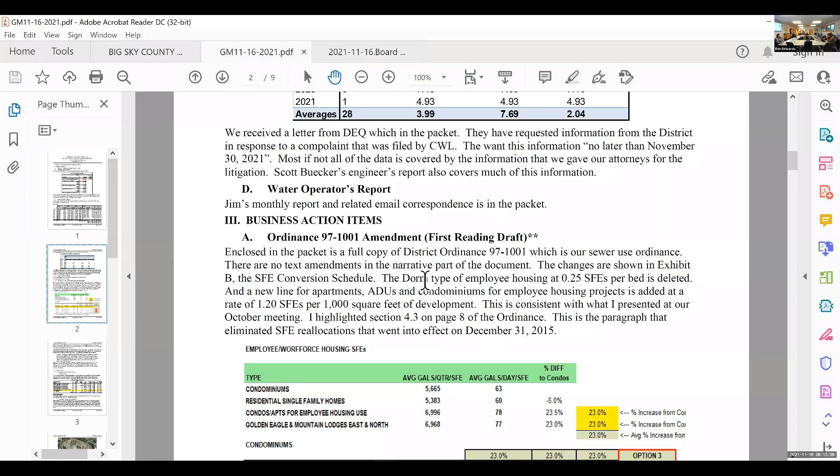All right, so I wrote a little narrative on this. This is a follow-up to our meeting in October. The table in my report is what I had presented at that meeting, and it was the consensus of the board to put this forward into effect.

The recommendation was to go with 1.20 SFEs per 1,000 square feet for ADUs, apartments, condominiums that would be used for employee housing. As they started looking at this, originally I thought we would just make an amendment to our rate resolution, which is a one-time approval. But the table, Exhibit B, resides in Ordinance 97-1001, which is our big sewer use ordinance.

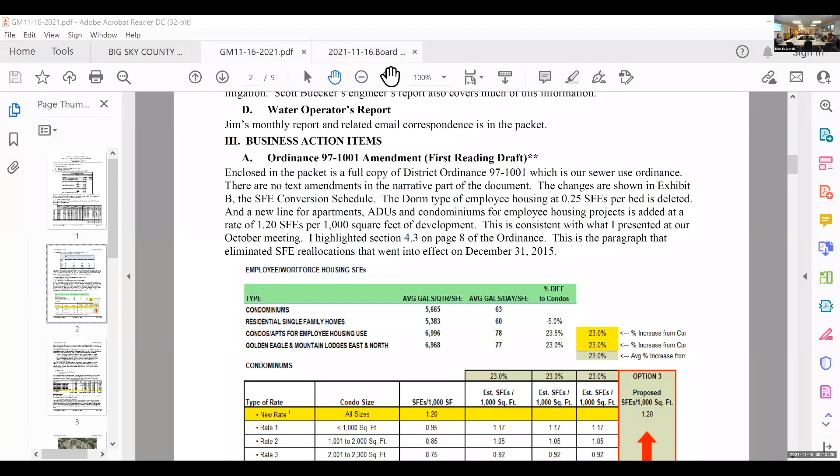And I put a copy of the entire document in the board packet for reference, but the only amendment is actually to the exhibit. And in my report, I commented that I'm going to talk to Susan about pulling that out of Ordinance 97-1001 and putting that as part of our rate resolution material, which makes these amendments much simpler, because now we're into a first reading, second reading, and it takes 3 months, 3 board meetings to accomplish these kinds of changes, which is not the best setup.

So on Exhibit B, we're going to delete dorm style housing as a category, and that was a per-bed 0.25 SFEs. We're going to add in apartments, accessory dwelling units, and condominiums per 1,000 square feet at the rate of 1.20. That's the only amendment that is presented here.

The base rate stuff will go in our rate resolution, which we can't really do until this is approved, and this is going to take 2 or 3 readings. If we make no changes to this document, it can be approved after the second reading. If it changes between now and second reading, then we're going to a third reading. And I do think that this should come out and be part of our other rate resolution document.

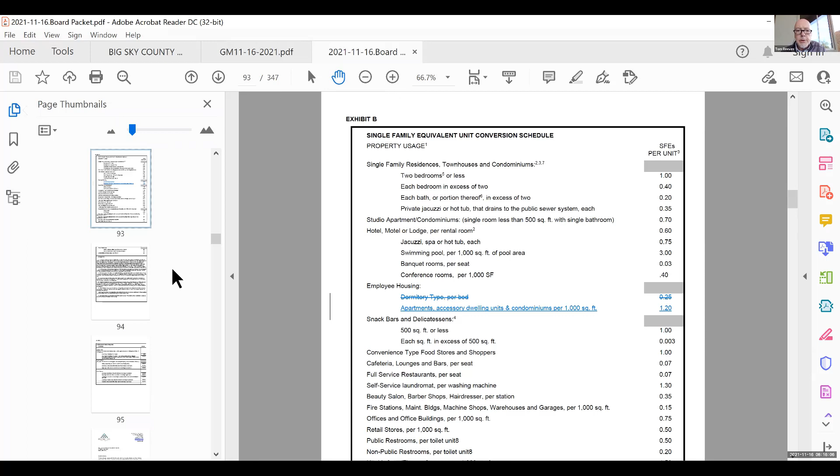I heard that you said that Danny Bierschwale was in the audience. Could you comment on what your expectation is of the impact to our commitment for 500 SFEs for affordable housing?

Yeah, Tom, thanks, appreciate that. Danny, come up to the microphone here. So in the board packet, Danny sent me a letter.

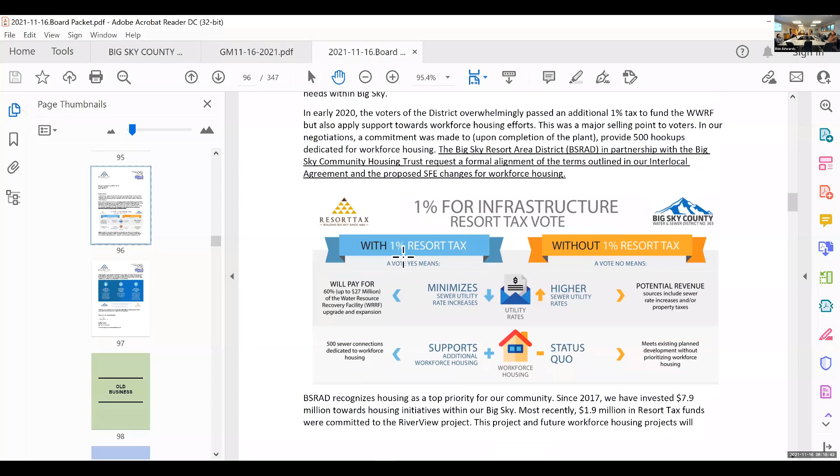It's the last 2 pages of the business action section. He's citing material that was circulated prior to the election, and it does use the term hookups. Hookups are all over the place for us, so we measure things in terms of SFEs.

Our interlocal agreement clearly calls out 500 SFEs, and I'll let Danny comment past that.

Yeah, just wanted to certainly appreciate the fact that you all are going through and trying to create equity around your rates and making sure that you're being fair across the board.

In our initial discussions related to the commitment of the 1% for infrastructure as it relates to WWRF, we had initially discussed 500 units. We had been working towards hookups. Maybe it's semantics, but our expectation at that point was targeting this concept of 1,400 units that we were trying to achieve for workforce housing, which is a target that the community had identified in planning for community housing initiative here within Big Sky.

At the date that we had signed the interlocal agreement, an SFE was an SFE for a workforce housing unit. So it never really came up in discussion. And as you all are going through this ordinance revision, I just want to make sure that we're honoring what we had told the voters and what the spirit was of our initial discussions as it relates to workforce housing.

I'd use the specific example of this Riverview project: they're seeking 100 SFEs, and under the new equation, if I did the math right, it's somewhere between 130 to 150 SFEs that would wind up getting utilized. So essentially, what would have been 100 going away and depleting from that 500, bringing our balance down to 400, but now all of a sudden have a different equation that we're operating within.

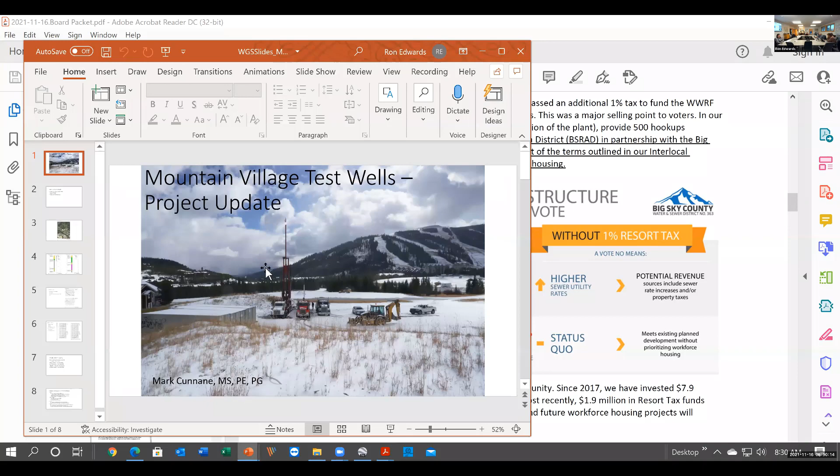Mark, can you hear us all right? I can, can you hear me? Yeah, we got you. Okay, so you'll be operating the slides, Ron?

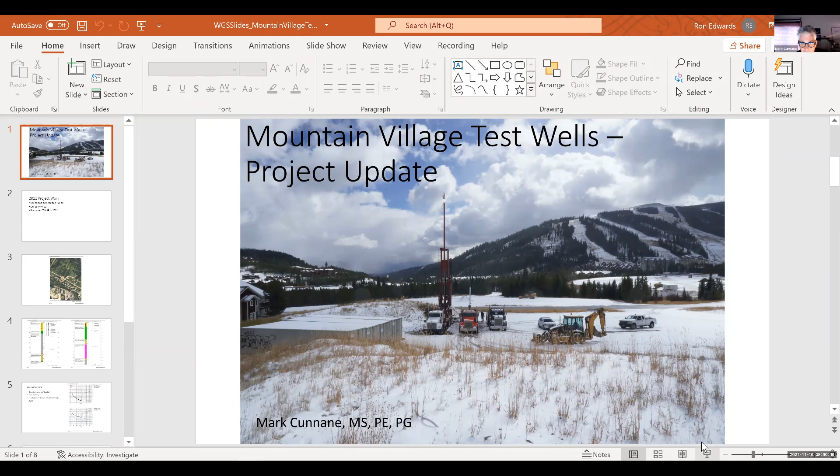I will. Okay, well, this is just the test well 7 site. Just kind of a background photo, so we can go ahead and move on. Next slide.

Okay, so this past season we drilled and tested test well 8. I'll show those locations on a map on the next slide. Then we drilled test well 10. Those are both right in Mountain Village. We didn't drill test well 9. There were a few site issues with it, but also it was targeting some of the intrusive igneous rock, and we just have not found that to be water bearing. So I've got a suggestion for a relocation of that well that we'll go over in the presentation.

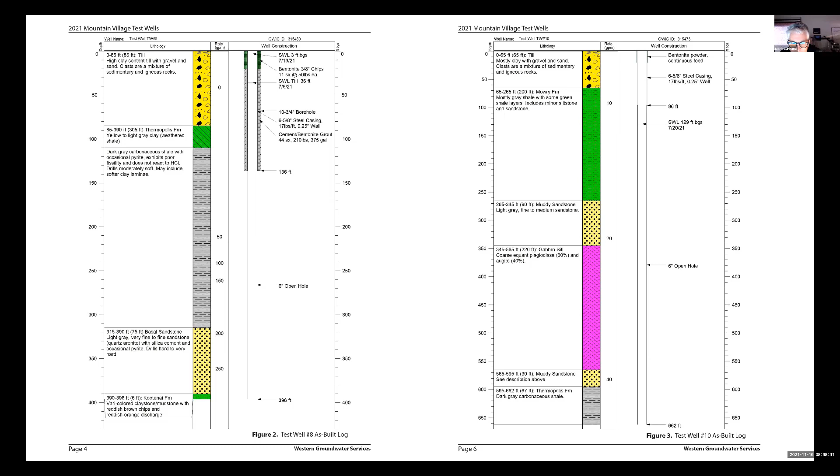Okay Ron, we can move to the next one, please.

So we did a step rate test in well 8. The driller provided the temporary pumping system and installed all that equipment. We did a step rate test, then came back and did a constant rate test. The step rate test data is in my memo—I won't go over it today, but it indicated we could run our constant rate test at about 200 to 225 gallons a minute. We ended up running it at 220 with some minor fluctuation around that rate.

So what we saw is that in test well 8, the drawdown continued through the duration of testing, and the recovery was not what you'd hope for. We're seeing the effects of boundaries on the aquifer again, which we've seen in test well 2 and test well 7, so we've pretty much nailed down that condition. We also saw it in Mountain 5 and Mountain 6.

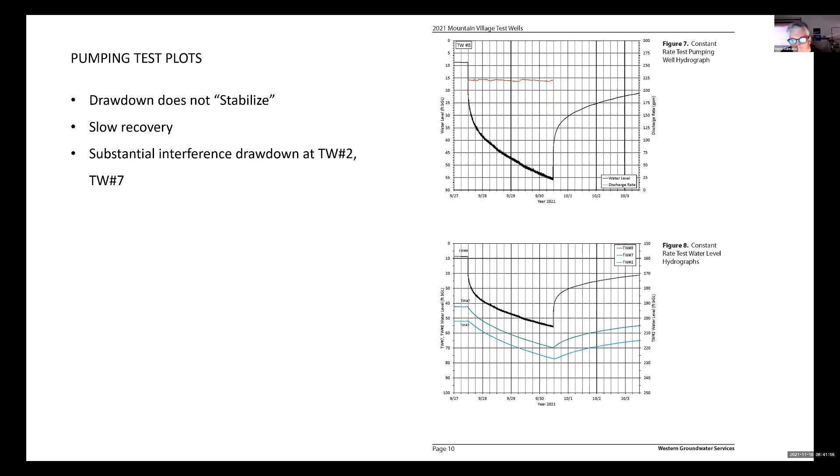So here's the hydraulic analysis that I do to estimate what our well capacity can be. And I've discussed this with you prior in relation to the other wells where we've seen the bounded response, which is well 2 and well 7. Those are the only other two we tested.

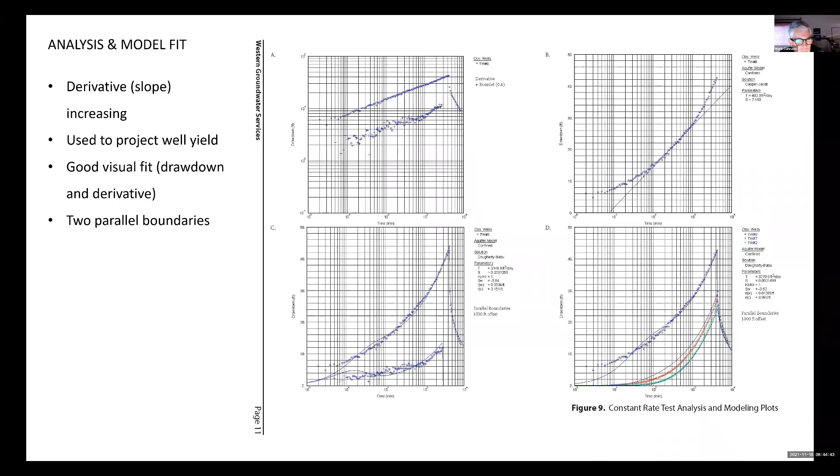So, okay, water quality - I've got the yield, and I ended up estimating that well for 110 gallons a minute, 56 acre-feet a year. That's on the following slide. But anyway, the water quality was good.

I was surprised you didn't have sulfides given you're producing mainly out of the shale units. Yeah, there wasn't a whiff of them - we measured sulfide as non-detectable, but I also, in the field, collect it in a bottle, shake it up, and uncap it. That's one way you can kind of get an idea if you've got sulfide, and yeah, there was no odor with it. It did have a lot of carbon dioxide in it, which is not uncommon, especially in these aged formations. But it degasses - that's the case where you fill up a bottle and it's cloudy, and you let it sit for 30 seconds and it's crystal clear. That's kind of how this water is coming out of the ground.

But the iron and manganese was non-detect. The sulfide, arsenic was non-detect. The radionuclides, you see very low level detections, other inorganics too. It did not measure the organics - we typically don't worry about those in wells like these, because they've got to be related to some sort of anthropogenic input, and we just don't have that source to get to these depths in a well sealed like this. But the dissolved oxygen is non-detectable.

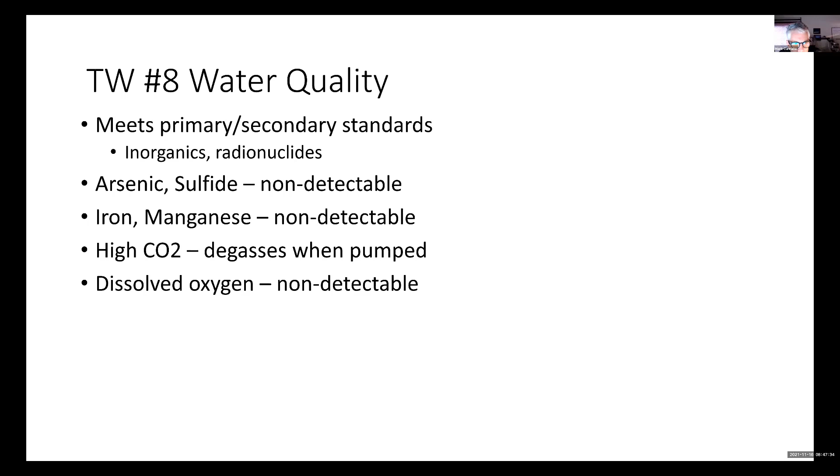Not surprising there. The one thing about this is like well 7 had arsenic, it had iron and manganese, it didn't have sulfide. But you think when you pump a well like this with that kind of hydraulic connection, there's certainly a chance the water quality could change to some degree over time. Particularly when you produce a well for longer duration, you'll start to produce from zones that may not have been contributing much during this short-term test, but could contribute a greater proportion of the flow over a longer pumping period. So you might see that water quality change, but at least from what we have, that's a good result. So you can go ahead, Ron, to the next one.

So the one thing about that design rate and volume, I've listed it here, and this is in the report also: the 110 gallon a minute, 56 acre feet. The 110 gallon a minute is the modeled pumping rate for 180 days continuous pumping to use up the available drawdown in that well. The 56 acre feet is 5 years. So we're getting out there quite a ways, right? But as compared to the time period we tested, which was 3 days.

But what I can't do with the model is know whether that capacity is going to stabilize, and whether you're going to go on with this use indefinitely, or whether you're going to start to see that curtail with time. I don't know that, so that's why I've got that caveat: production capacity could diminish with use. Maybe it'll be better than I modeled. Typically with that kind of trend, the way that data continued, I wouldn't really expect that, but there's always surprises.

Completion phase: I didn't do a cost estimate, but the way pricing is now, I would expect something on the order of $500K to get this well connected to the system. Of course, that work can be done in the planning phase, but from the discussions we've had with Jim and Ron, this would connect into the upper system. So it would connect into a pipe very nearby that would go to the Cascade booster. And I understand there's treatment considerations for 5 and 6, and that kind of all happens in the same place. So this would be a fit.

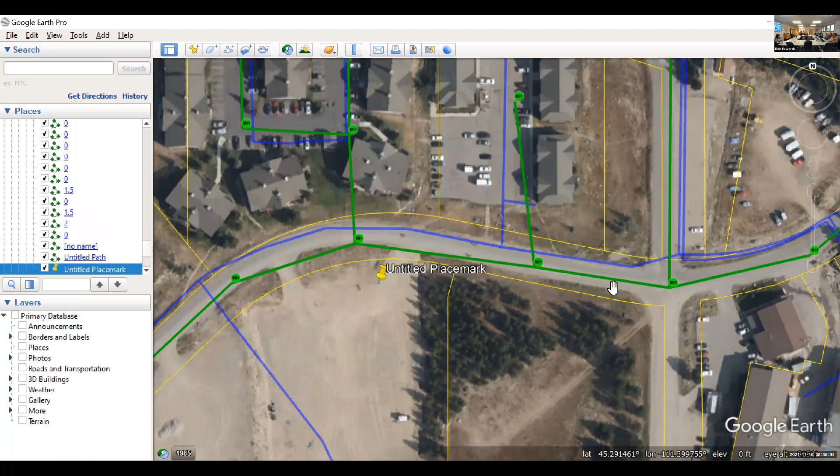So, Jim, you want to comment on the hydraulics of this? Let me back out. So we've got this dedicated line that runs up to the Cascade booster station. Isn't it a little bit... where the well is? One of the benefits of this location, we're too far, the test well's right here. Well, you need to, Jim, come back and talk to the mic. Oh, okay, just use the mouse to point stuff out.

Well, the goal is to get water to the Cascade, make Cascade be independent of the Meadow system like it was originally. This well is in a good location to contribute to the Cascade side, because here is the location of the test well. Got the issue with the sewer, but as Mark said, we've got a lot of things going in our favor to not make that a big deal. But this pipeline where you see here, there's 2 of them.

One of those is a force main where we are right now bringing the hill water up to Cascade. So this is a force main going directly to the Cascade booster. The distance to tie this into Cascade is literally from here to here. It's a very good location for that.

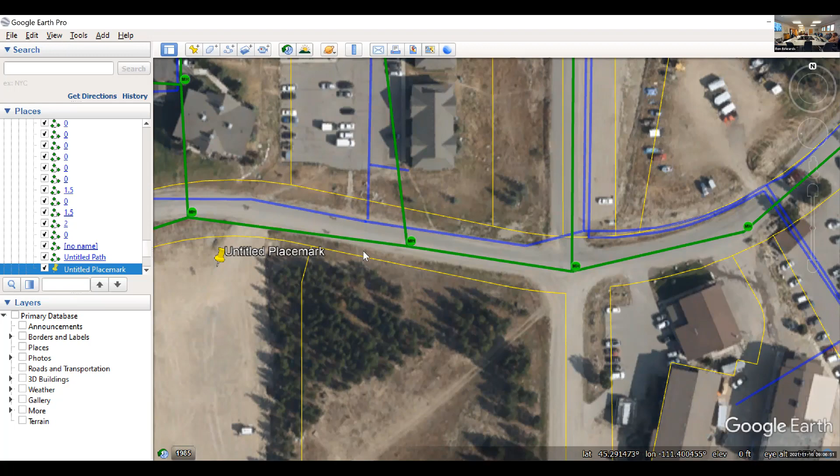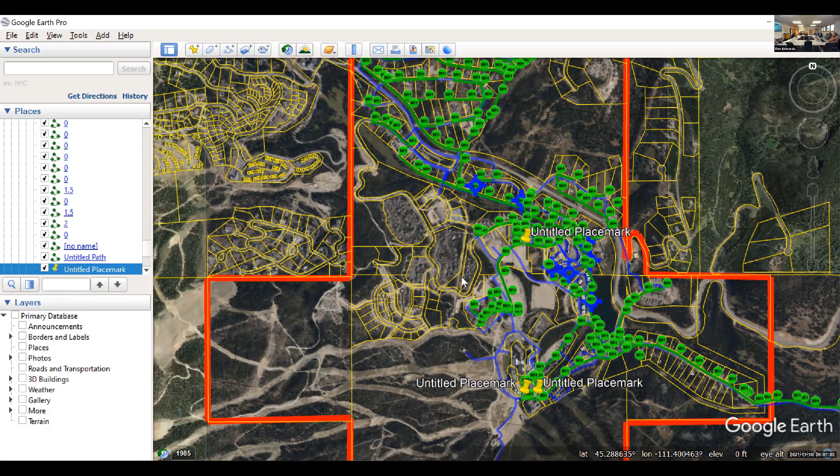All these test wells, there's a lot of consideration for them. If they need treatment, right now the area we're looking at is gathering this up, taking it to the Cascade Booster for some sort of treatment. Probably what might unfold in the future, based on the development, is that well's biggest challenge is the arsenic, dealing with that. But it is a good location for growth, and there's distribution system in there to handle that growth too.

So it's at the point, well taken, but yeah, it's a very complicated chess game, trying to deal with the geography up there and the area we're trying to serve and the elevations. It's no small task. Where was test well 6, Jim?

This is the right, Montana Club. Trying to remember. Right there, a little to the left. That lot right to the north, right there, right in there. There's water mains already in there now, and roads - all that's the new Montana Club that we've been working on. So the blue lines are incomplete on this particular slide.

It's a good one from a development perspective because it's a utility tract for us and parking, and it was actually a helipad site for emergency use up there as well. Starting to get too congested though. That was the only comment on it - that's where our growth is going in our master plan right now. So as we go to the west, or to the left of the screen, it'd be great to have a source that can grow into that.

That's part of the benefit of this overall well exploration - dealing with problems we have today and preparing for what's coming. Back to the demand question, I saw Mace log into the meeting. Woodard & Curran did an analysis for us when we did our big study on the Mountain Village water demands. As I recall, Mace, I think you said like 5% of the demand is actually the Cascade part of our system, and 90 or 95% is in the mountain core area.

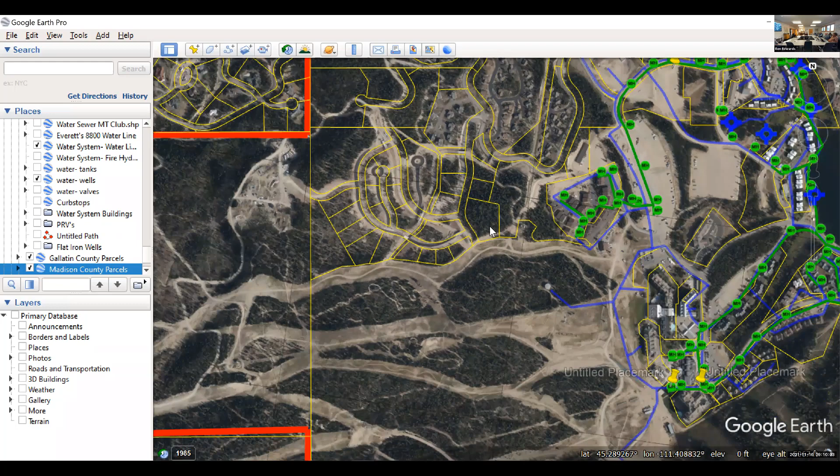If the Cascade wells would have done what they hoped to do, we would have been able to deliver 2 million gallons a day to the mountain. Right now, we can deliver about 700,000. You tied into the Meadow.

Back when the Cascade system was designed, you weren't tied into the Meadow. Yeah, that was a big part of this too.

So this is a really good plan, and one of the things we're discussing, I've been an advocate of, using Kelsey and Scott and the engineers as value engineering. What makes sense to me is our biggest customer on the mountain is the Yellowstone Club. We've got an agreement with them, 125 Yellowstone. So we may switch some of the loads. I made the example with Shockey and Cheyenne. The Yellowstone Club, if we can put them on that upper system demand, the only reason to do it is just to try to balance the loads between them, so you don't have very little demand but a lot of wells sitting idle on one side and some other wells on the other side that are working all the time. So we're definitely working through all those equations.

And if we can get a supply of water, we can make the system a lot more efficient. And it's not just a matter of finding water, it's being able to get it to where it needs to go efficiently. It doesn't matter if you have 2,000 gallons a minute of well water if you can only deliver 300. And that's kind of the way we're sitting right now.

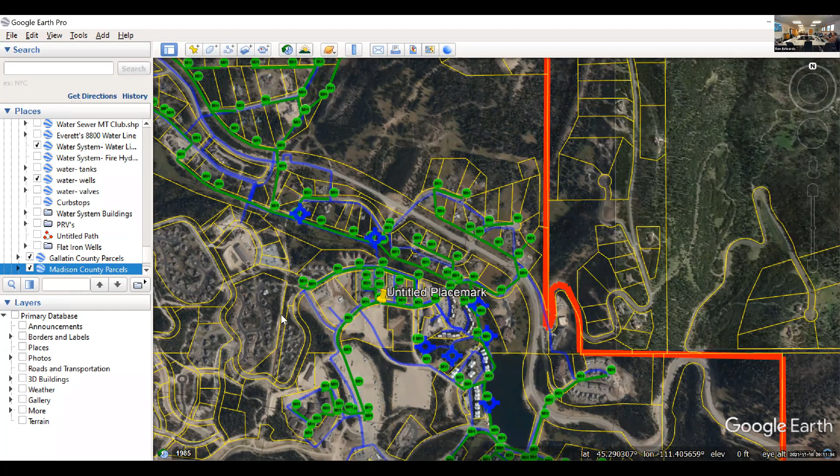So that brings us back to the location of getting the water to the right point. We've been kind of kicking that Cascade tank well down the line until we got more data from these other wells. So given that, this well number 8, potentially 5 and 6, do we still have demand in Cascade to continue to look at exploring that well?

Well, I've talked to Mark, he doesn't like that well very much. But it sure would be convenient. He doesn't like black holes. Yeah, exactly. I forget which test well number that was, but we did drill a well up near the tank here. Test well 1. Yeah, out of convenience, obviously, it's right next to the storage. Pumping costs. I don't know if you want to comment on that well, test well, Mark.

Well, the strike against that one is it's about a $500,000 drilling project to finish that. That site, we actually just targeted water, but we ended up drilling through the intrusive rock, so that became the de facto target. And we drilled that well to about 882 feet, I'd have to look, but it's right in there somewhere. And so to get, we did not have water production.

So to further test that site, you'd want to plan a well down into the Kootenai. Now you're talking 1,700 feet. You're needing to bring drillers in from somewhere else, you're not going to have a local driller drive up and drill that one. And even if you did, the costs still go up, and you've got to drill it with the mud rotary method. Everything we've been doing on this project has been air rotary, and that was quite intentional, to drill a bunch of sites where we could check for water with the most cost-effective drilling method.

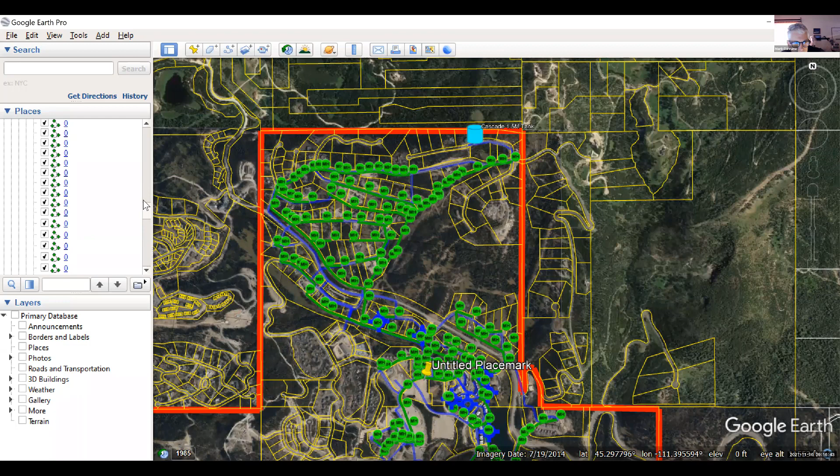So, just to touch on the Madison, with the information we have, there's no reason to not expect the Madison to also have a bounded response and possibly low capacity, likely low capacity. So yeah, I just don't see that as something I'd want to guide you folks into. You could, it's iffy. I think it's doubtful you'll hit a home run with that, and when you spend that kind of money, that's what you want to get.

The other aspect of the Madison is you want to acid stimulate those wells, which gives you a little chance to get more production, and it's very effective in that formation. But the logistics and difficulty of that project would drive the price up. It probably costs double or more what you would pay at a site more amenable to the drilling operation and all the disposal you have, because when you acid stimulate, you've got to develop all that fluid out of the well and haul it away. We're talking 3-4 trucks, 24/7 for a week to do that kind of stuff.

So yeah, it's a big project. And with that kind of an uncertain outcome, I identified a Madison well site down in that andesite anticline back in the report I did in 2009, because that's your shortest depth to the Madison there. But even that is a difficult area. To take on a project like that in this kind of terrain, certainly it can be done, but you've got to really want to do it. That's for sure, because it's going to be logistically difficult. I don't know if that answered your question - I kind of rambled on there, but my general impression is I think it's very risky to sink that kind of money into a project at that location.

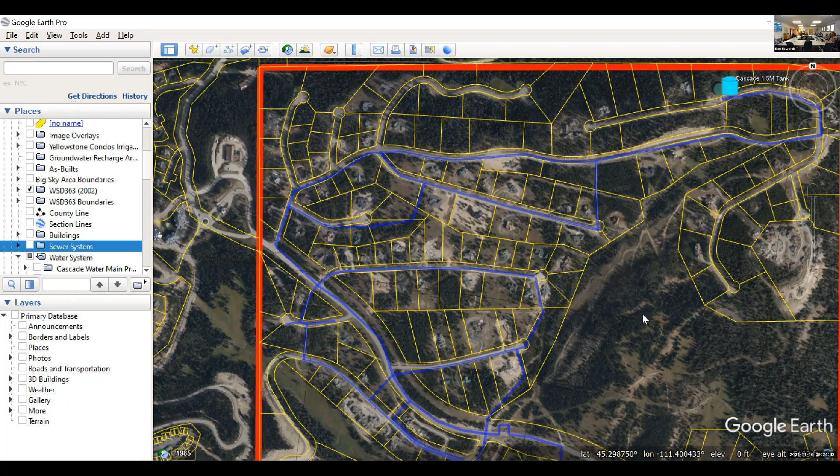Well, the Thunderwolf well - do you think that'll be a test well next summer? Now that we know what we know from the last 2 summers of testing wells and striking out in the areas we have, I would absolutely recommend it, and I talked with Mark about it yesterday, because now the goal - one way to relieve the pressure on the mountain may be to help Lone Moose and Aspen Grove stand on their own two feet. That would be a big benefit here. A 100, 200 gallon a minute well there would keep us in shape for a long time for those developments. 600 gallons a minute would even be better.

Didn't Spanish Peaks do some testing? Not sure. Well, it's very close to what the Flat Iron people have presented and all that. Mark identified that as a potential a long time ago, but at the time we were thinking, yeah, but we can't really bring that water back up on the mountain without a 600 PSI challenge - huge. But now, as things unfold and Aspen Grove and Lone Moose are a burden on the mountain system, you're reconfiguring the system basically to accommodate the source.

John Olson, are you on the call? He logged in earlier.

I think test wells were done there, almost positive. Do you look at that data? We'll answer that. Mark, did you hear the question? No, if you could repeat that, please.

Well, I think you flagged it in the '09 source capacity plan that there were some test holes that were drilled. They're right above the arrows, that little two-track. I think it's something we should just finalize once and for all. I've brought it up a couple times. I just never could confirm it.

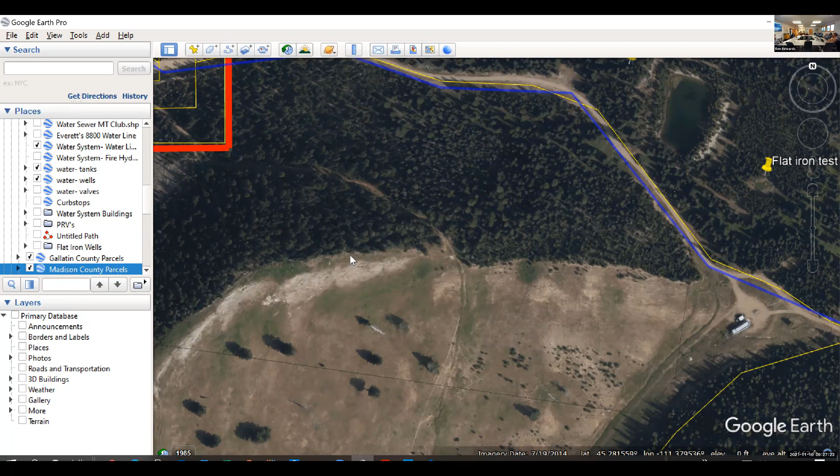We do, just on here. Yes, if you look at your flow sheet in the report and look at the amount of water leaving Lone Moose Fault, that is 100% Aspen Grove consumption. Hidden Village right now is supplied by the Meadow system. So Aspen Grove is on the mountain, Lone Moose is being supplied by the mountain with a small contribution from the original Lone Moose well. It's very small, but primarily the mountain.

There's your mountain transmission. Your mountain transmission flow coming down, that's that 131,000. Right now, we are running all of Lone Moose on the one well that is operating because the demand is incredibly low up there.

So you had originally two wells, Mark, correct me, were they 100 gallons a minute apiece or 200 gallons a minute apiece, but they all played out. Now we can get about 17 gallons a minute out of one well. With a very limited amount of demand in Lone Moose, especially this time of year, we can actually supply that with that little well. The remaining balance of water is going down the hill to Aspen Grove.

So with the virtual meter system and that number there, we can tell you exactly what Aspen Grove has been using. Like 3.5 million gallons a year.

Well, you got to factor in there's fire storage requirements and things like that. But so the possibility of finding them, hopefully we can find a well in that Lone Moose area that takes care of those two entities and their demand. And once again, the water that we've been bringing down off the mountain towards Lone Moose, that number will go back to zero and we can save that water on the mountain village. It's the strategy.

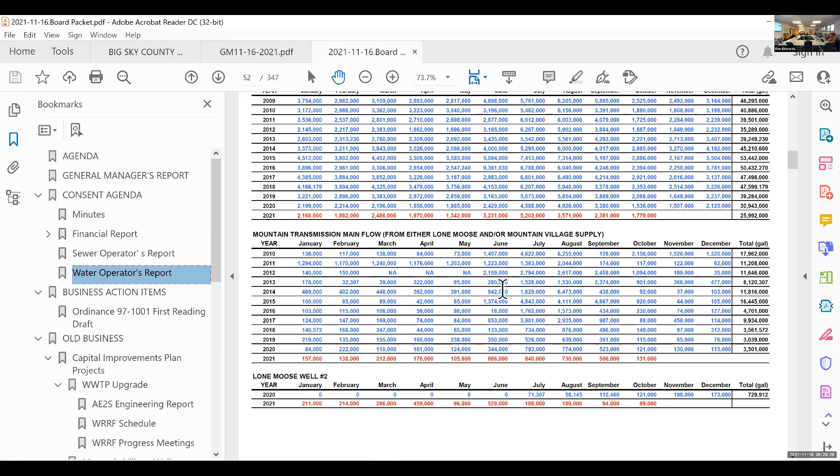So I've got another question for Mark regarding well 8. Obviously, that was a pretty significant success as far as water quality and location are concerned. Are there any other locations nearby where we could get into that same water?

Well, you could, but you might find you're interconnected, because you would have to stay in that same structural trend. And what we've just seen is we have strong interconnection almost 2,000 feet away, in that trend.

Move east to west on that. Yeah, east to west is a no. Because we've pretty much looked at that, and the rocks are dipping on the west side. They're dipping west, and on the east they're dipping east, and so you end up with deeper drill depths. That's where we were targeting that intrusive rock, because getting to the deeper formations was going to require, probably in the mud rotary drilling method, more expensive test wells.

So move north-south along the anticline then? That's where I think you're going to be connected. So I haven't really looked at that. You'd the one spot you could look at, and is to the south. And I could give that a look. I really haven't looked at it, but you'd need to get

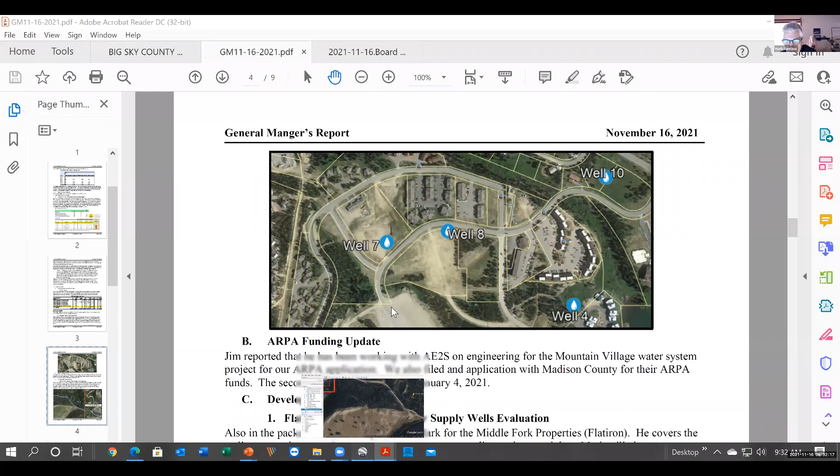Test well 6 in that utility lot is sort of in that ballpark. Test well 5, which is by the Mountain Village tank, that could also do that, but they're both going to be more expensive wells.

You will be into that bounded system. I would expect you to be in the bounded system, but it's something you could consider.

In the future, test well 5, I'm looking at my GIS, is basically dead on the trend. It's probably fall between test wells 7 and 8. It's about 2,300 feet from well 8.

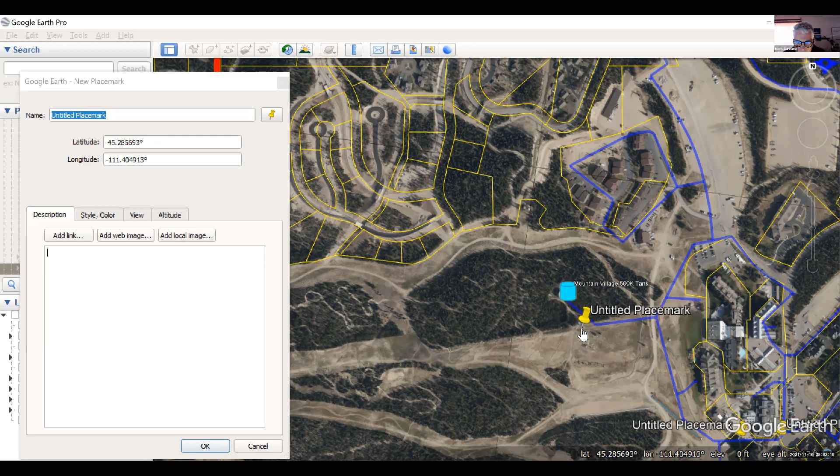You could drill a well there, but when we drilled that test well 5, I'd have to look, but it's as deep as was reasonable to go, and we're just touching into the top of the Thermopolis. So you've got 800 more feet of drilling, so it's going to put you into that more expensive well scenario. The strikes against it are the same as up at the Cascade tank, but it could be something that's looked at.

If the district has to move in that direction.

Mark, didn't we at one point explore that there was that pullout that was off the spur road? It was basically the anticline itself. That was test well 2. We went up on the uphill side of it. That's the well he was referring to that had the connectivity to these.

If we could move this out and show you all the test wells. Oh yeah, he's already got points there too. That one had a real strong initial response, but then ended up being bounded.

Is there any possibility that ended up on the other side of the anticline and that was why it was bounded? No, it's dead center on the anticline, that test well 2, if that's what we're talking about there.

So yeah, it's just in it. Well 7 is here, test well 7 appears to be just on the west side, if not right on the hinge. Well 8, test well 8 is a little bit on the east side of the anticline.

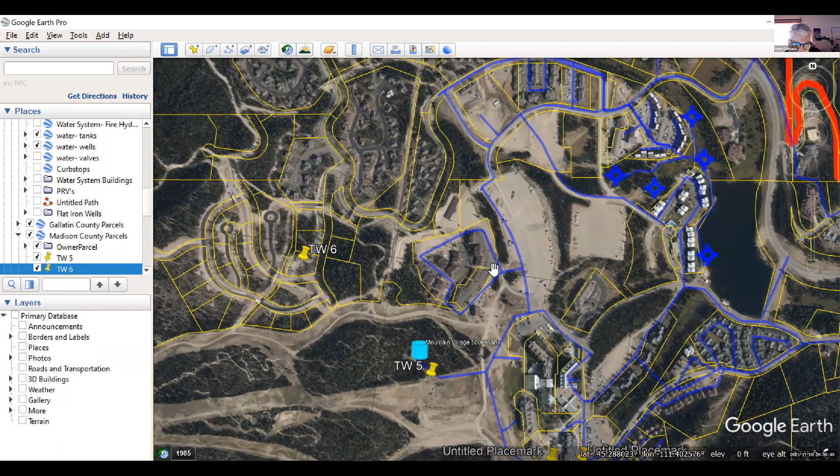So I guess we'd look to get that deviation on well 8 as a first step.

Well, based on everything I've seen, and I think Jim would agree, we need to keep moving forward with making this part of our public water system. We've got to flesh out some demand issues. It sounds like you're still working on that, Kelsey, with Jim.

Yeah, current demand, the Woodard and Curran CIP report has a demand for the Cascade, including Cascade Subdivision, Powder Ridge, and Montana Club of about 520,000 gallons per day. So that with the 125 gallons per minute for Yellowstone Club is about 475 gallons per minute build out.

So the Woodard Curran report was 2015, I believe. Yeah, so January 2016, basically. Well, and a lot of development has taken place since then, so we need to update that.

And it's important to understand that the demand she's referring to would be the full build out. That number is more than what we can produce for everything. Correct, yeah, we've got to catch up to that.

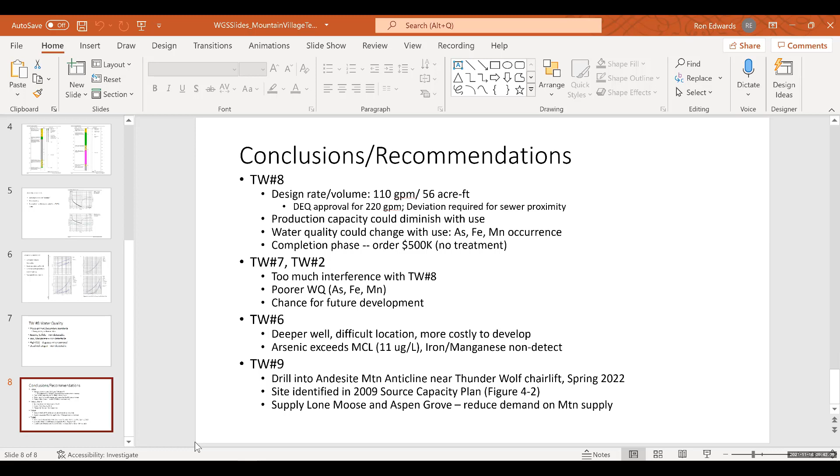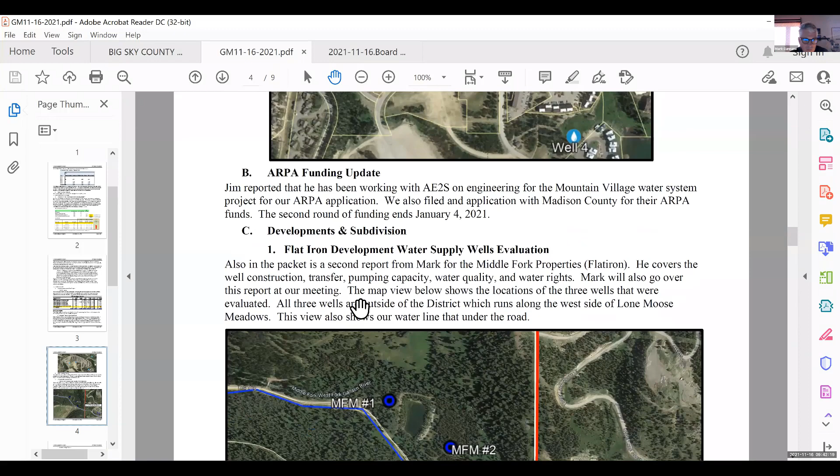All right. I think that's the first part of your presentation, Mark, and now we're going on to Flatiron well evaluation. Yeah, Ron, you've got that. Yeah, I've got a few other slides for that one. I've got the other one here, Mark. Yeah, okay.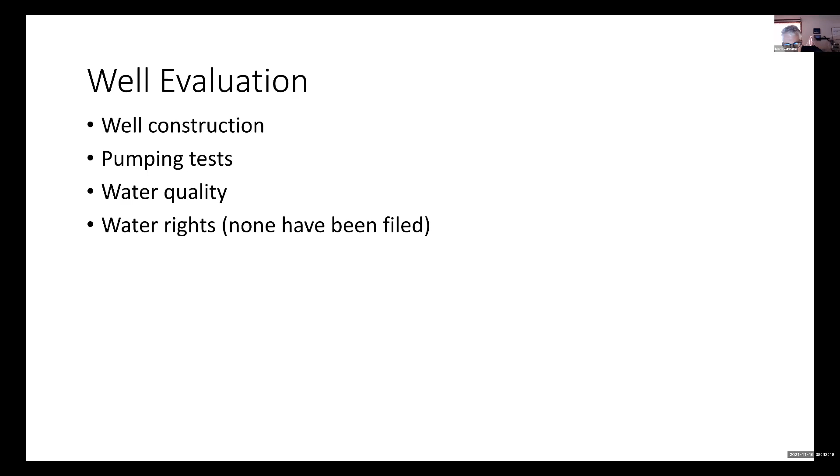So here's the wells - I call them, they call them, Middle Fork Meadow number 1, number 2, and number 3. That's what MFM is for. Only number 1 and number 2 were built. These were drilled in October 2008, maybe into November. Number 3 was started and then terminated. This was the prior landowner who stopped drilling in relation to the start of the recession - that was, if you recall, October 2008.

I guess things were going south then, so that well never got built and it's probably not usable. So I'm only looking at number 1 and number 2.

I'll go over this geology a little. This picture shows the geology overlaid onto the air photo, made transparent so you can see the trees. You can see the Thunder Wolf chairlift right next to MFM number 3, a little southwest from it. If you go due west from that chairlift, you'll see Kootenai in parentheses next to the symbol KK, which is the geology map symbol.

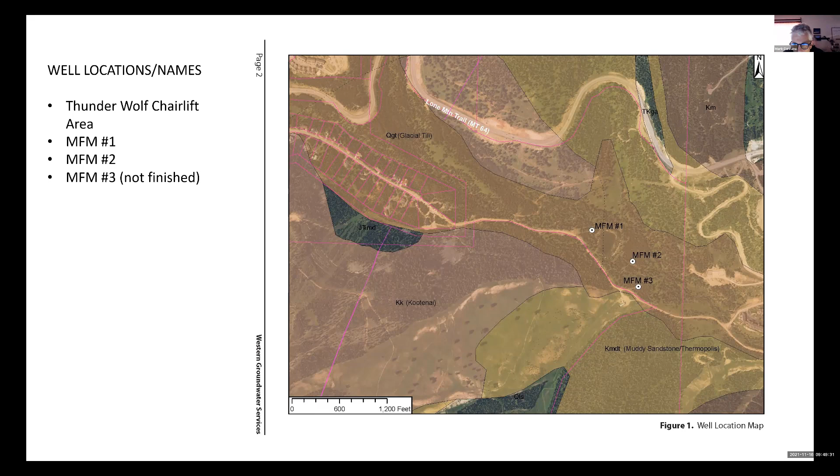So here are the well constructions, and they did get approval for these from DEQ—of course there's no reason you wouldn't get approved. They're both good constructions with deep casing seals, and they're both artesian wells. MFM number 1 is the one on the left, and number 2 is on the right there.

So the shut-in pressure, you have to have shut these wells in at the surface, or otherwise they'll flow continuously, but they come to a pressure of about 22, 23 PSI at location. So that's something you got to consider to complete them, but certainly not a problem.

But they built these, they drilled 16-inch holes down to some depth, and number 1 down 45 feet. And then they set and cemented 12-inch casing into that. That already meets the sealing requirements for DEQ. But then they went ahead and drilled 12-inch out that casing all the way down to, in the case of the number 1 well, 200 feet. And then they set and cemented 8-inch casing into that. And then they put in a liner screen, which I expect was just lowered down and dropped in place. You know, they drill an 8-inch borehole out the bottom of the 12, and then out the bottom of the 8-inch casing, and then they lower this screen down in. And that's the way both the wells are built.

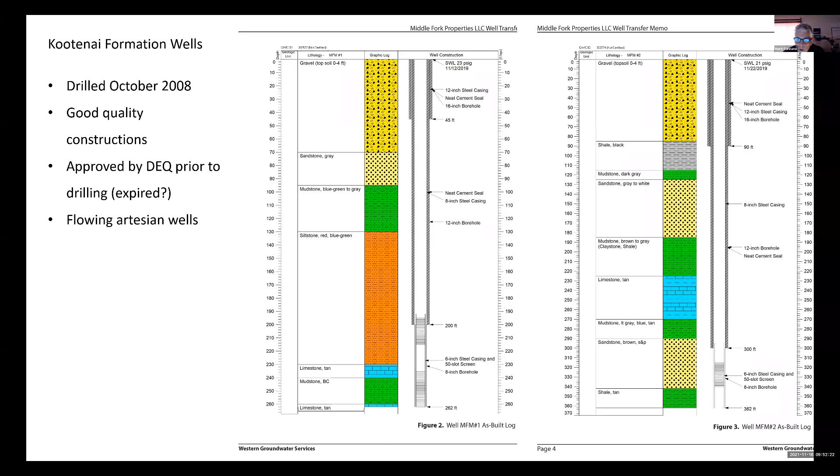I guess I do have a little note. I expect if these were to come into the system, you know, that approval by DEQ is back in 2008. Who knows? It probably didn't ever get followed up with on as-builts. You know, I expect there'd be some sort of resubmittal to get approval for the wells again. But anyway, that's well down the road. We can go to the next one, Ron.

So in the number 1 well, they did a 74-hour pumping test, constant rate. They did not do a step rate test, which is not essential, but it's something I always use. It gives you better ability to estimate your yield with that. They didn't measure the flow with computer logging equipment, which also is in the same category. I mean, that's the way we used to do it 20 years ago.

And these tests were just run in 2019, by the way. So these are not old tests. These were tests by the present landowner, not tests by the original landowner that drilled the wells. But this well ran at 315 GPM was the test rate. So I did a hydraulic analysis of the data. I'll go over that quickly here in a minute. And I estimated this well at 240 gallons a minute, 161 acre feet per year. And I'm using the exact same criteria as I did on test well 8 that we just discussed.

I do think there's some flow limiting response in the data I'll go over. One of the big issues or significant issues in this is both iron and manganese exceed the secondary standards. So you don't have to treat that water, but you guys might feel you do. They're non-enforceable standards, it's a fixture staining issue. Certainly, both iron and manganese, when exposed to oxygen, will precipitate. And so there is that issue with this well in particular. And as I'll mention, it's to a much lesser degree in the number 2 well.

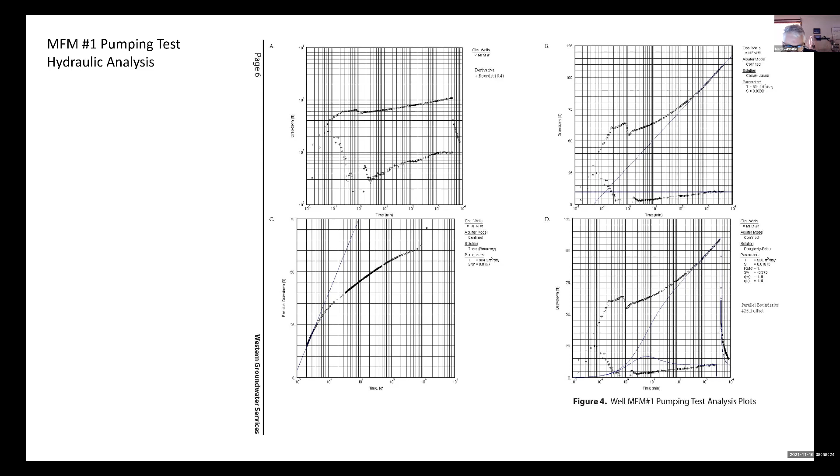But we can go to the next one, Ron.

So number 2, they ran that for 49 hours. The generator quit during that test, and probably, I don't know what time of day it was, but no one was out there, and that wasn't inappropriate. If I was running it, I probably wouldn't be out there either. But anyway, being an artesian well, it recovered but it just started to flow. What they needed to do in this test was run it, shut the pump down, and shut in the well. No one was there to do that, so we don't have the recovery phase data on this well.

For what I'm doing in this analysis, I didn't see that as a big deal. They tested it at 201 gallons a minute, so call it 200. They didn't test it, but my analysis was you could safely run this well at 250. From what we see in this test data, you could run that well at 250 24/7, day in, day out. Based on this particular test, DEQ would limit it to 1.5, two-thirds of the test rate, so that's where the 134 comes in. But this test was a constant pressure well response, which I'll show you.

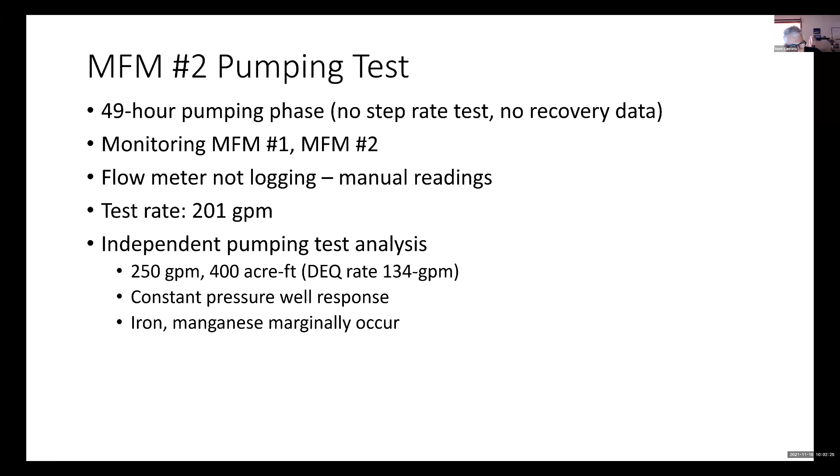Okay, so here's the analysis plots for this, and I'm hoping you'll all be experts on hydraulic analysis when I'm done with all these. But anyway, here's another one. That upper left plot is telling of a well's production potential. You can see the circles are the drawdown data, and you can see how they just flatten out after 1,000 minutes. And the crosses, which are the slope of that line, continue with a downward trend and ultimately just bottom out at a noisy value of zero.

Actually, the early time of that test, around 10 minutes to 30, 40 minutes, we actually see a constant slope. It's a good radial flow response. The plot on the upper right, you can see where the drawdown points, the circles, fall below that line and go flat line. Well, that's a fully stabilized drawdown. So that drawdown's become invariant to time. That's a well that is getting a source of recharge equal to or greater than the pumping rate of that well.

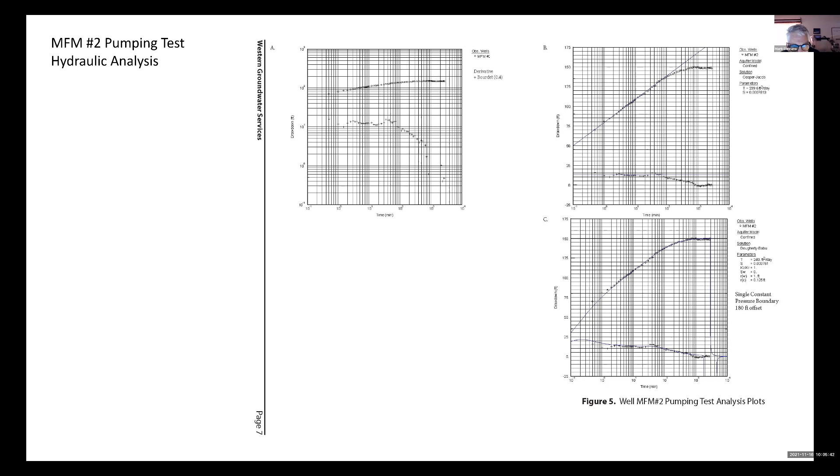So, of course, the first step in doing anything on these wells is to establish terms, to see if there's a viable transfer option for the district. My conclusion is both wells could be used. Well one would need, you may likely need to treat that water. But if you could come to satisfactory terms and you did want to proceed with it, you'd have to start from scratch, planning your project and costs, et cetera.

Water rights, I've outlined in the source capacity plan from '09 and in 2015. You could add diversions onto your existing rights. In fact, that's the strategy for test well 8. You've got plenty of volume. I haven't updated it since 2015, but back then, the water rights were going to have sufficient volume for the district out to like 2035. So these wells would fit on that.

The thing you might have to apply for is new beneficial use. Now you can do that. That's how you have to add rate in Montana. You can't add rate through changes. You have to do it through a new application, but you would not be applying for any volume. So the adverse effects to surface water is not in play when you permit that way.

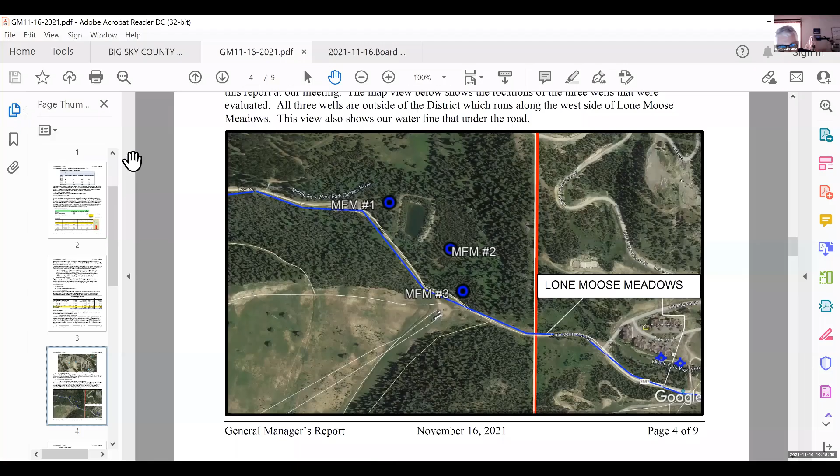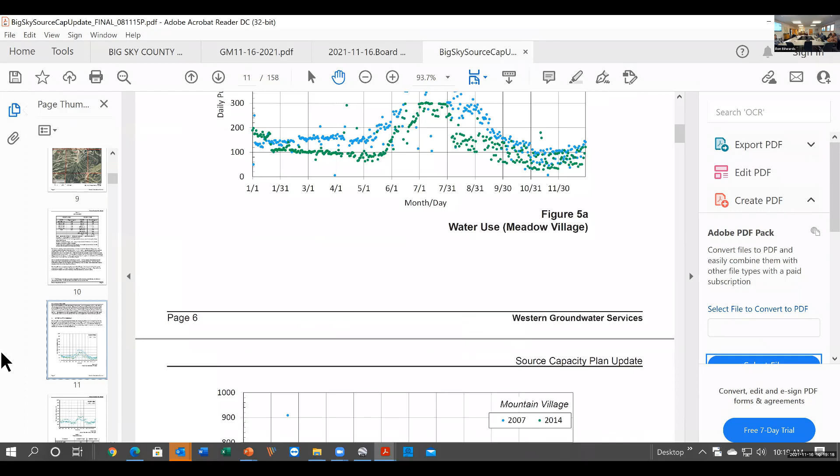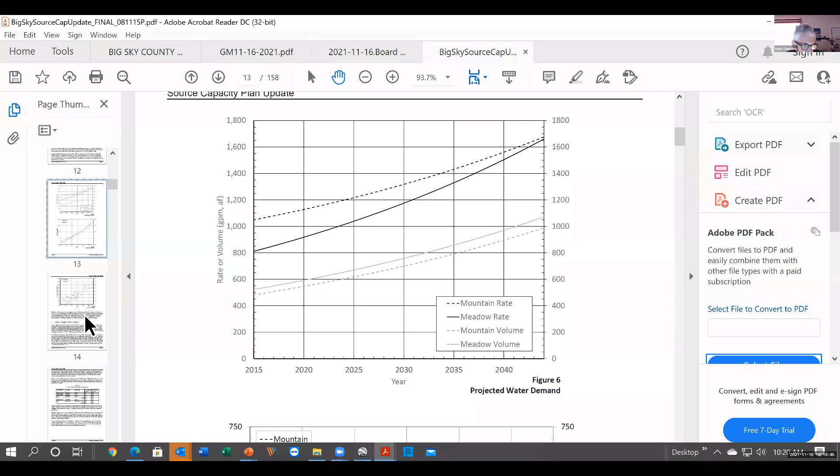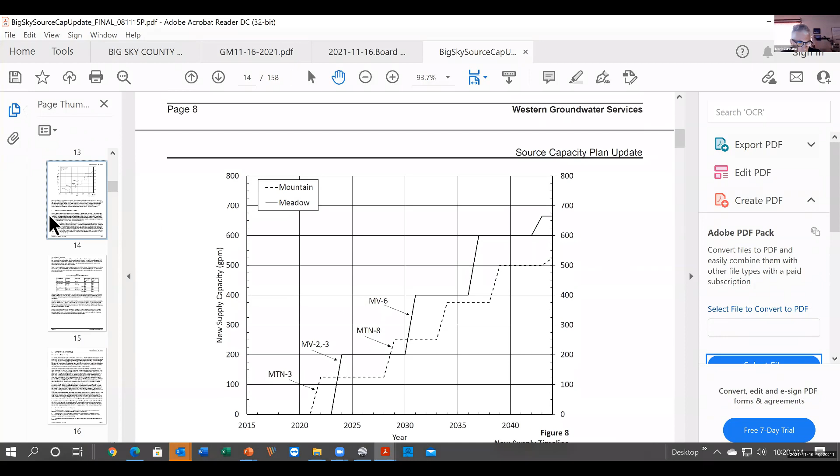So I'm looking at a plot out of that 2015 plan, and I just pulled it up, Mark. If you go to page 8, text page 8 — it's been a little while since I've looked at this. This is text page 6. Go down to figure 6 and 7, there's two plots on a page. If you scroll down, I've got figure 6. I'm not seeing it — oh yeah, it's PDF page 13, Ron. Go down just a couple. There you go, now scroll down to see the lower graph on that same page. There's figure 8 — which figure do you need? Seven. It's the one your cursor's on. Yeah, there's figure 7. I'm still seeing figure 8 on mine. You've got a delay, I've noticed. You've got to get up to PDF page 13, one above you. He's still lagging — there you go, okay.

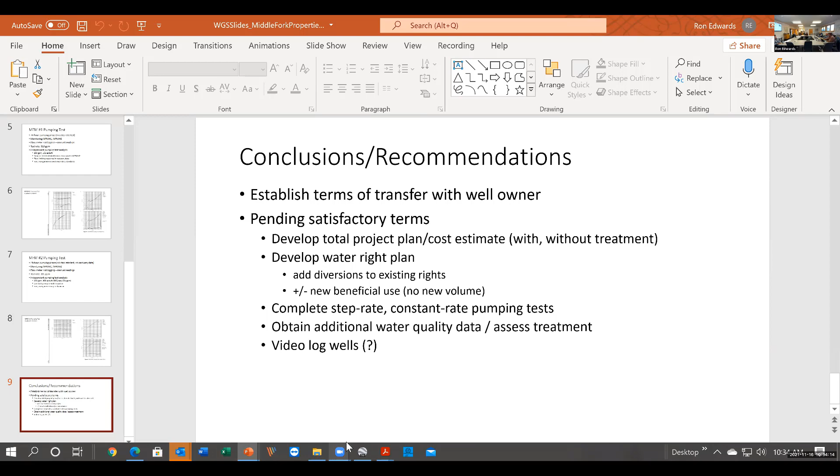Where were you, Joe? Right next to the lift shack. Is that what you're saying? No, I think, is that Brian? Is that you talking? Yeah, I think there's actually...

I would want to go out there and look at the area. It doesn't actually have to be there. One area that looks potentially interesting is up to the northwest.

It looks like the terrain's flat enough if you get to the northwest, more up across from that little pond. Looks to me like there might be a place to get in there too. Right across the road is what you're talking about. Yeah, because that comes in pretty steep there coming off that hillside too.

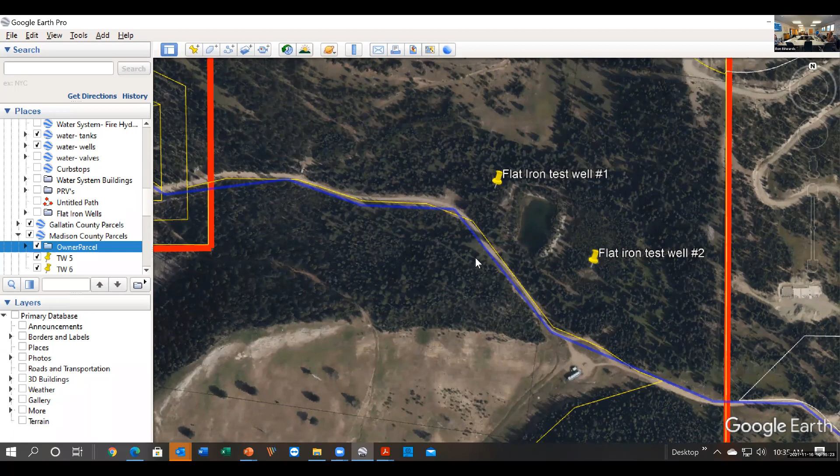You see where that MFM number 1 well is, right? If you went due south of that, there's a bike trail in there. Are you getting on? I've only looked on Google Earth. It looked like you could maybe get a rig in, yeah, where that cursor is. Is that too steep? The rock ground comes right through there. That's actually pretty flat in there, and there's a road there, so you could definitely get a rig in. So that area struck me as something we would certainly look at.

Just looking at the water quality from those two wells is significantly different - MFM 1 and 2. We're looking at 10 times the amount of iron in MFM 1. So is there some mark that you could identify geologically that's causing that difference? Because we're basically way above the treatment threshold with number 1, and below or acceptable levels with number 2. It's the same thing.

I'm not sure that either of their wells go through the Kootenai. They intentionally didn't want to go through the Kootenai because they anticipated iron and manganese issues in the lower Kootenai. They think their MFM number 2 well actually penetrated the Kootenai, but there just wasn't really enough thickness to get through it. So I understand why they concluded that based on the sandstone they drilled into, but I'm not so sure they actually got there.

Are we asked to provide that input, Ron? I just walked back in - what was the question? Do we have any role to play in that PUD meeting as far as water rights available, or capacity for treatment, sewer treatment, wastewater treatment? What's the upcoming commissioner meeting for December 15th for Flatiron - do we have a role? Not that I'm aware of, no. They're not really asking us that kind of stuff, are they, Steve? They're more looking at other merits in the project at this point. Well, first off, they're not in your district. Correct, so that's a small detail. And then secondly, I think to the extent this is a question, it's a question that's contingent upon DEQ expressing adequacy for that water supply. And as Mark points out, this testing data is really old and kind of needs to be updated.

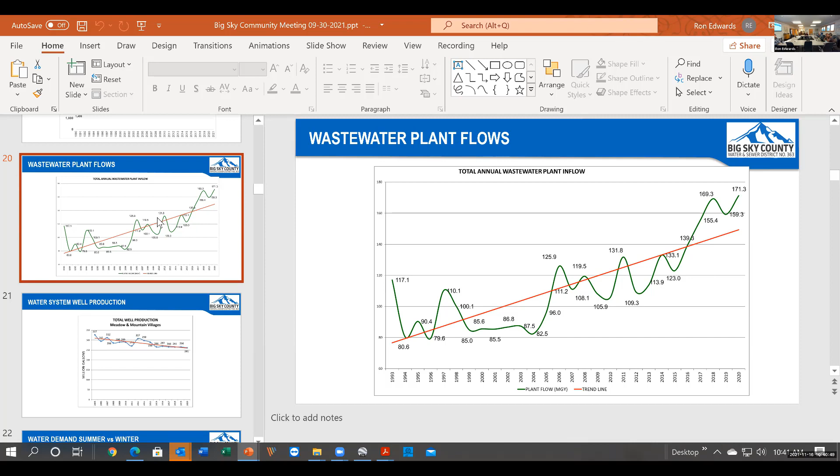This is a couple slides I presented at the meeting this fall down at the WMPAC. This is a graph showing our wastewater plant flows over time - that's about a 5% curve increase. This is a remarkable graph.

This is our Meadow Mountain well production totals going back to 2005. So through rate setting, adding water meters, fixing leaks, we've actually decreased total production over time. I don't think that line will continue to drop, but to these questions about capacity, well production, that is a pretty good story right there. It is. The Yellowstone Club is a partner in that because they've done a good job fixing some problem leaks up in their demand areas, so that helps our numbers in the mountain.

When we took over the water company in 1998, and then we raised rates, it was all a fixed rate SFE thing. We had some really big production numbers the first 5-6 years of operating that.

Tom, Guy here. May I make a comment? Go ahead, Guy. This is in reference to Dick's question, and I would argue, again, from a conservation community perspective,

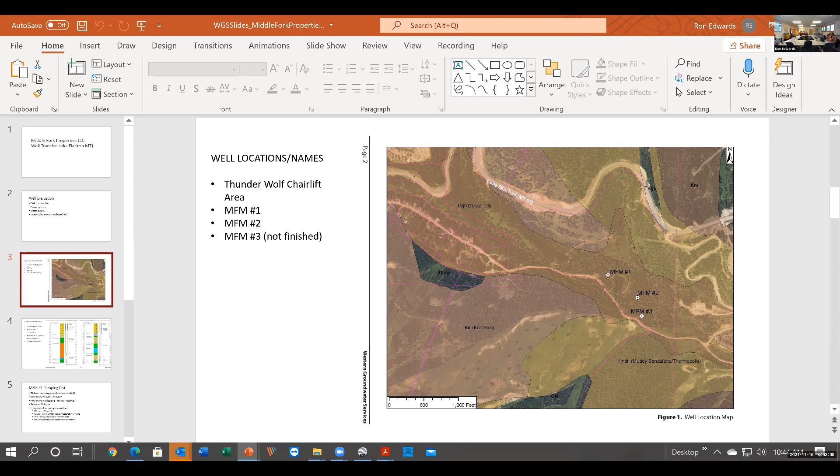Do we have anyone from Flatiron on the call? Anything they want to add to this? We have the letter they sent us requesting the 2,000 -- just communication, it was informal. It's good timing for communication if they have something. It'd be good to. No one? I don't think so. Okay.

Well, to Guy's point, we don't have capacity to service their development on the wastewater side. And my observation on these water wells they have is their full build-out uses up all of that water. So the benefit to this district really isn't there that I can see.

Chat message -- Vince just told me there's a chat message here. Well, before I pull that up, the commitments we've got with our old Yellowstone Club, Spanish Peaks agreements -- they've got a capacity entitlement, which I believe was 38 million gallons of wastewater capacity annually for this area.

This is our district boundary. All of this also lies in Madison County. These wells are in Madison County. Originally, they were going to do an on-site septic system or some sort of community drain field system up there. We've seen that they're changing that into wanting it all serviced by Big Sky Water and Sewer. And clearly the agreement is very specific to this area -- there's no commitment for capacity outside of that.

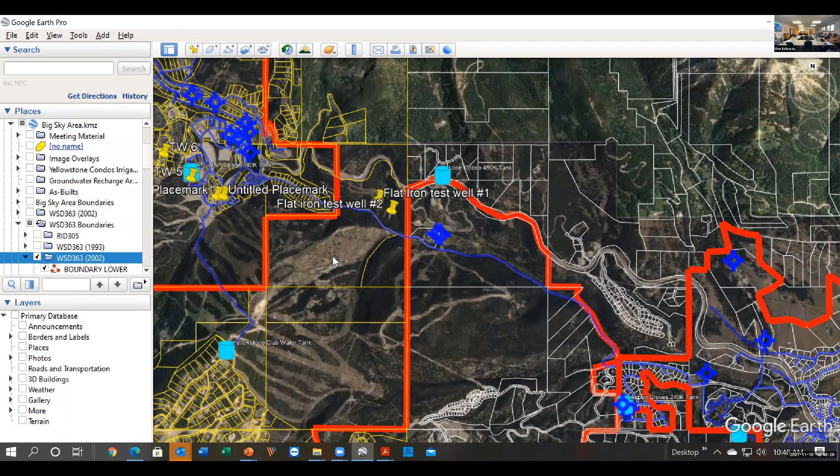Let me pull up this chat. I think it was John Stembler who wanted to ask a few questions. He's with Lone Peak Lookout. Yeah, that's fine. Go ahead, John.

Hey, good morning, y'all. Thanks for having me. I just had a few clarifications, kind of turning them back. Thanks for giving me a second. This is going back to the rate increase for workforce housing projects. Was it 0.75 SFEs per 1,000 before, and now the increase is at 1.2?

There was no category for that, so we're creating a new category, specifically the 1.20 per thousand. So the rate increases from 1.0 to 1.20 because there was no category. Right, we're creating a new category. There was an old category for dorm style that we're deleting.

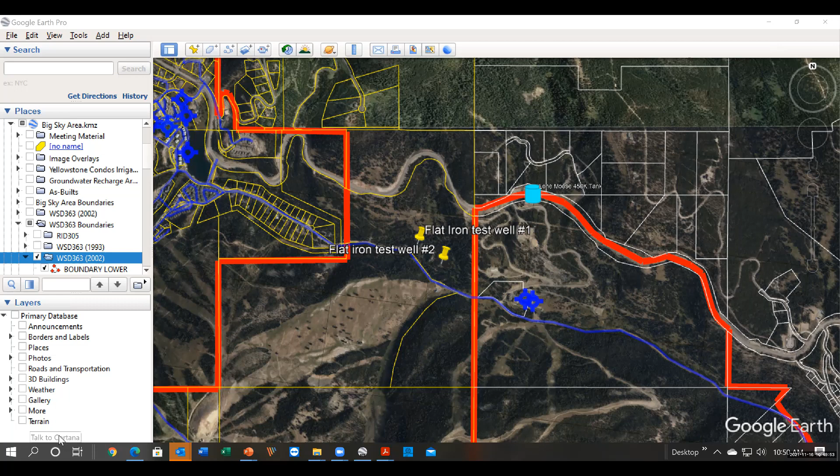Okay, copy, got that. Was going to ask, does the water district currently use chlorine for water treatment? Was there any issues with this in the past? I just heard that kind of briefly mentioned over the meeting. Currently, we do not use chlorine, no. You do not use chlorine, but you guys were discussing the possibility of it. Yes, it may become necessary in the future, depending on the water we find and what we need to do to treat it. Awesome, thank you.

I was gonna see if I could get a copy of the figure 6 projected water demand that y'all shared. Was that Mark's? It's in the source capacity plan, 2015. Copy. Yes, I can get to that.

And so just to confirm, we are projected to run out of water for the mountain by about 2021 and the Meadow by 2023, according to the figure 6 model, which dates back to 2015. That study was done in 2015. Thank you for clarifying, and we are gonna update it. You have that other figure?

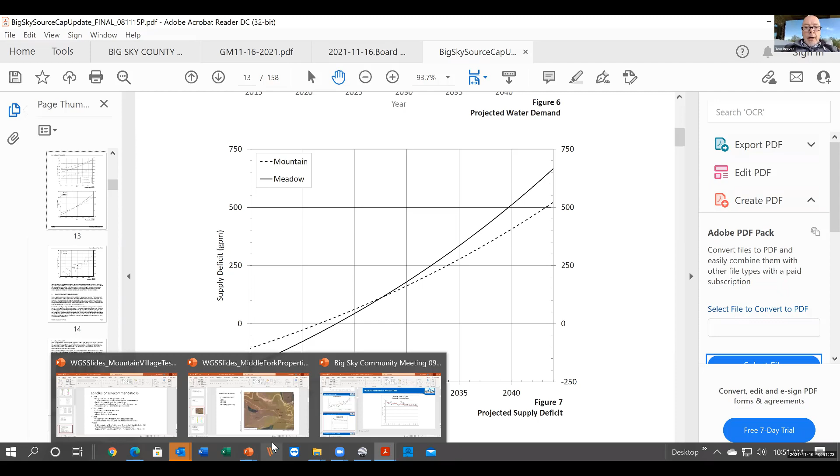Just so you know, John, that assumes our highest producing well in those areas fails for whatever reason. So it means that we have a deficit only if we have some kind of catastrophe. Copy, thank you for that clarification. I just didn't want to put that out there if those are helpful.

That's all I have for questions. Go ahead, there's an interesting figure up on the board there, which shows how, from the 2015 source capacity plan update, we've actually decreased our water usage. Yes, I kind of screenshot these things to help me later. That's all I have on my end. Thank you guys so much, appreciate it.

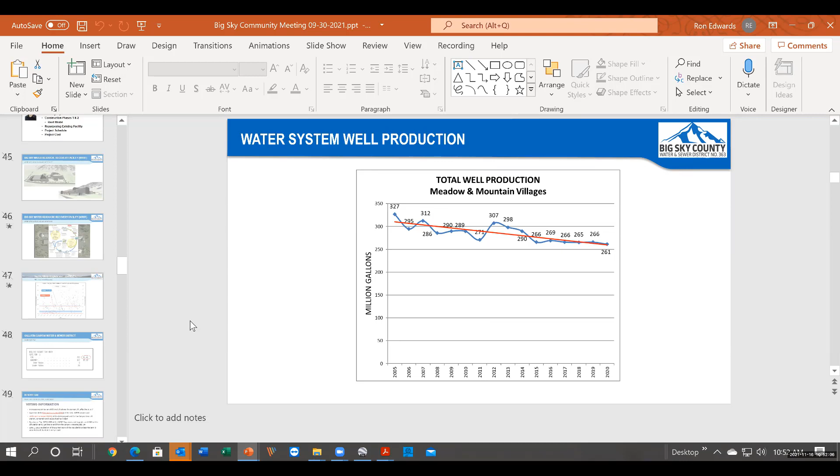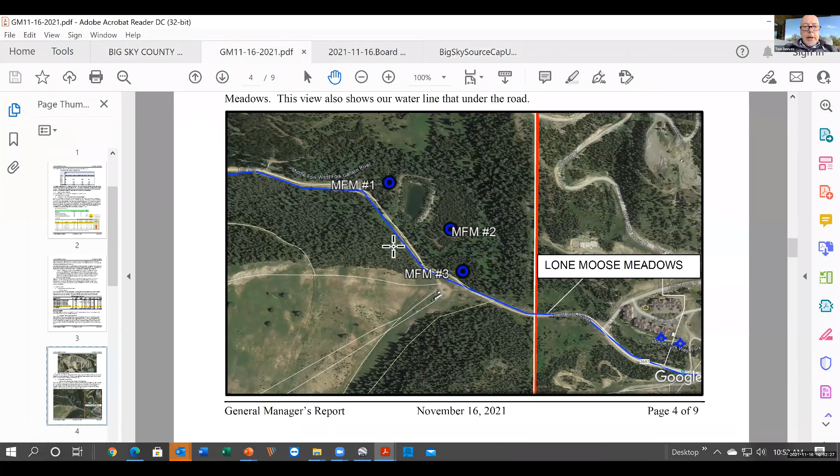Where were we? I'm not good at going in reverse on this. Well, I think the issue before us is that we got to redouble our efforts on finding water on the mountain, and I think we do need to redo the 2015 research on what our capacities are and our needs.

And since this study, Mark, I'll need to get a cost estimate from you to update it. Sure, yep.

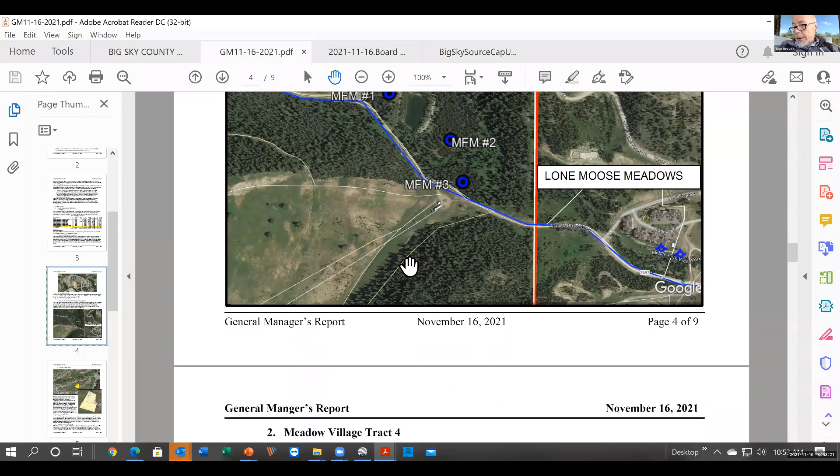Well, thank you, Mark. I wish you had a little more success on your wells, but thank you for the update and the information. I think we're ready to move on to the ARPA funding update.

Yeah, I did a little write-up on Tract 4. I just want to draw one comment out. When we met with them, we had a good meeting, with all the players at the table here in our office reviewing their plans. Jim made some good recommendations for how the water is going to be looped through this development area. Vince has provided good comments on metering and some of the other fire system needs. But they mentioned their plan has the parcel at 64 SFEs and change. We've had that on our books for a long time. Zoning would allow more than that based on acreage size and RMF 3500 zoning.

And the developer owner's representative mentioned that they intend to do workforce housing inside of this, and they would intend to exceed the 64 SFEs for the overall development build out. Phase one would be these units down on the south side. The other units would go in later. I don't know what that looks like. They indicated they'd be talking to the housing trust. I don't know if Laura's still on the meeting, if that's happened, or if there's anything to update us on that.

Well, Ron, let's just make sure we have our nomenclature correct. Workforce housing is not the same as affordable housing.

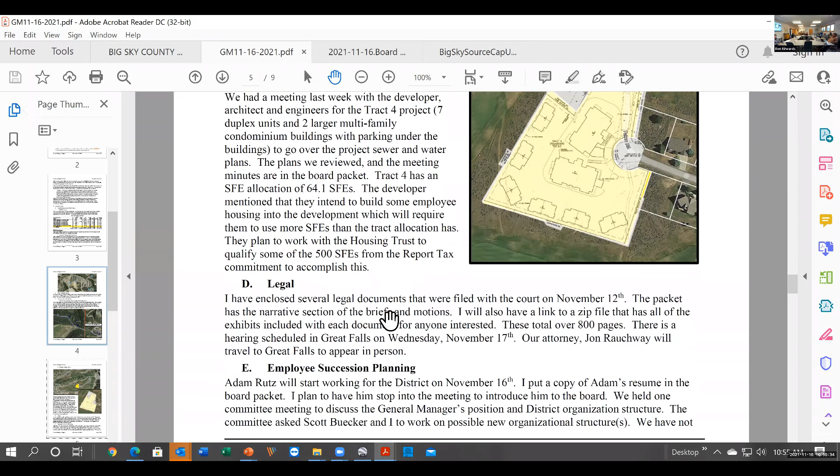Moving into ARPA, Kelsey's actually been our lead person helping us with this stuff from A2S. There's another round for irrigation projects. I asked her and Scott Buecker to look into it, and you did that. So the irrigation improvements are not eligible for that 10 million allocation because that's for irrigation or agriculture only, not golf course. So no non-irrigation or non-ag projects, even if they're improving surface water or groundwater quality, unfortunately.

You could try for the second round of competitive funding for irrigation improvements. It sounded like you and Buecker had talked about two options, potentially some golf course improvements being one, and the line going to town center under the road as the second project. Buecker thought the second project had more likelihood of success because it's not funding private infrastructure. Since the infrastructure is owned by Boyne, he didn't think you have a great chance of getting federal funds for private infrastructure. But it sounds like TD&H actually already designed that pipeline under the road, so you might have some points in your ARPA application for readiness to proceed.

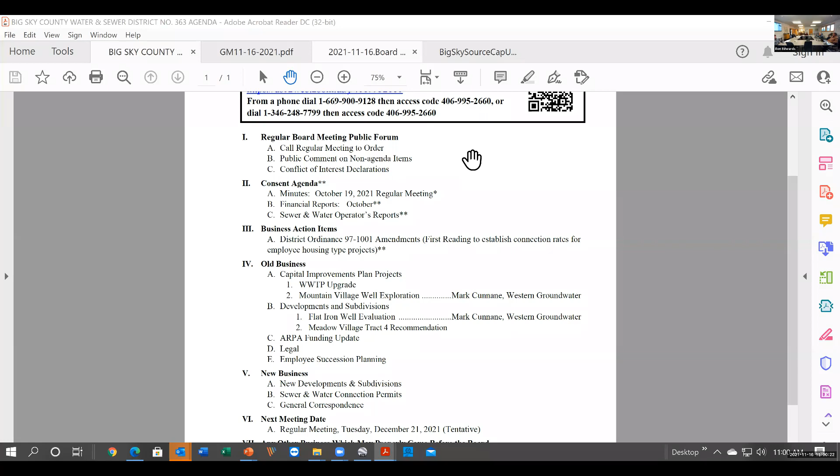So we're still pushing ahead on ARPA. The new money, we'll see what that looks like. When does that round go? I don't think they've announced the new stuff at all, but I think it's January 4th, or January 14th. This is the second round. Yeah, yep.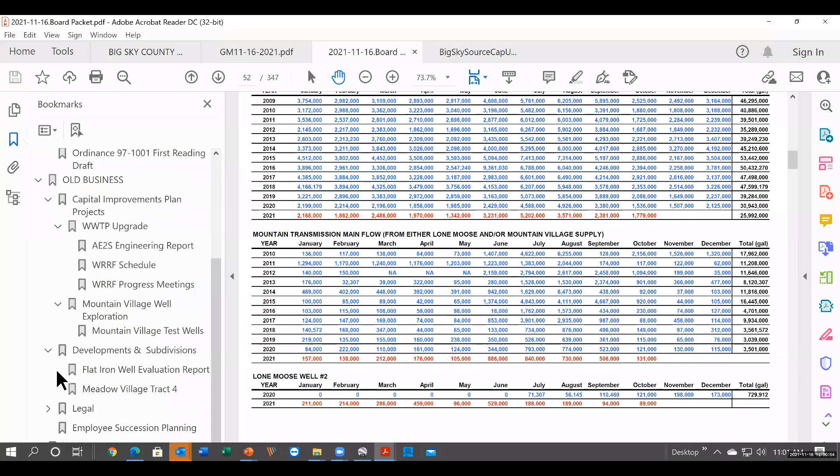All right, on to legal. So there's no board action here. The last couple weeks I got to learn how to spell documents, but I enclosed in the board packet the brief narratives with the defendant and plaintiff's motions for summary judgment and injunctive relief. So there's one plaintiff document, two defendant documents, and then I included a zip file for the board for anybody that wants it, all the submittals in the last month. It's over 800 pages of stuff, including all the exhibits and a lot of the transcripts from depositions.

And we've got a hearing tomorrow in Great Falls. Jon Rauchway is going to be up there in person. I may go up, I could easily be talked out of that. I wouldn't have to testify, it'd be more that I've worked with John for over a year. I've never met him.

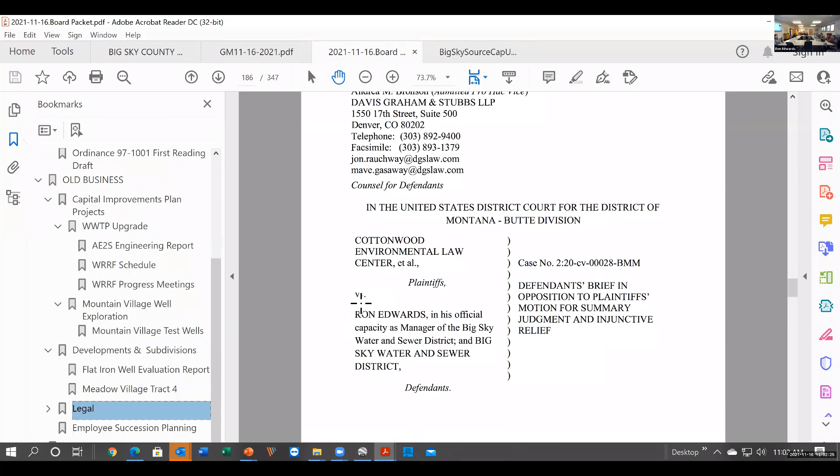So, Ron, we won't have a ruling tomorrow, we'll just have the motions. Correct? Right. Correct, yes. I mean, that would be our guesstimate, that there wouldn't be any ruling for tomorrow. John did mention in an email that the judge's scheduling of this seems to be a little accelerated, given the volume of these documents. What that means, I have no idea.

So all of this is FYI, these are public records, they've been filed with the court. All right, well, if I can't sleep some night, I'll go through 800 pages, but I think it's interesting.

Employee succession plan, all right. Adam, are you still behind me there? Come on up to the table. Howdy, y'all, I'm gonna zoom in here so you can get a better look. Putting you on the spot, hopefully he comes back tomorrow after sitting through a 3-hour board meeting. But it's good to get right in the mix of things, guys. So I'm happy to introduce Adam Rutz. He's our new hire as our wastewater operator, to hopefully start transitioning and taking over for Grant.

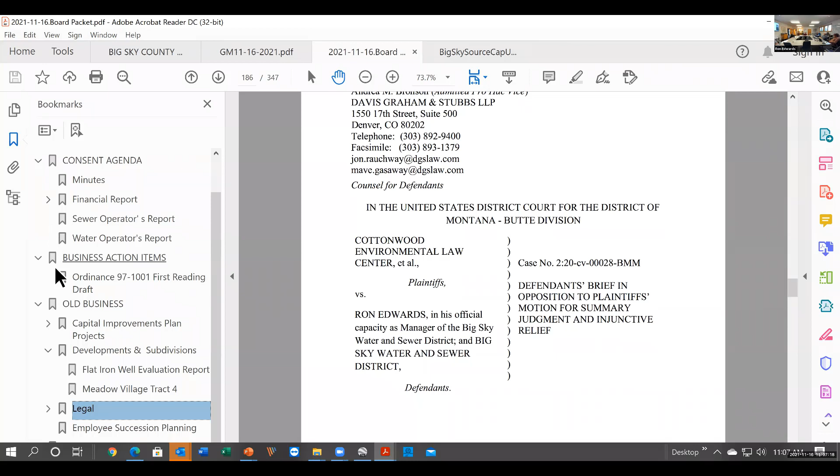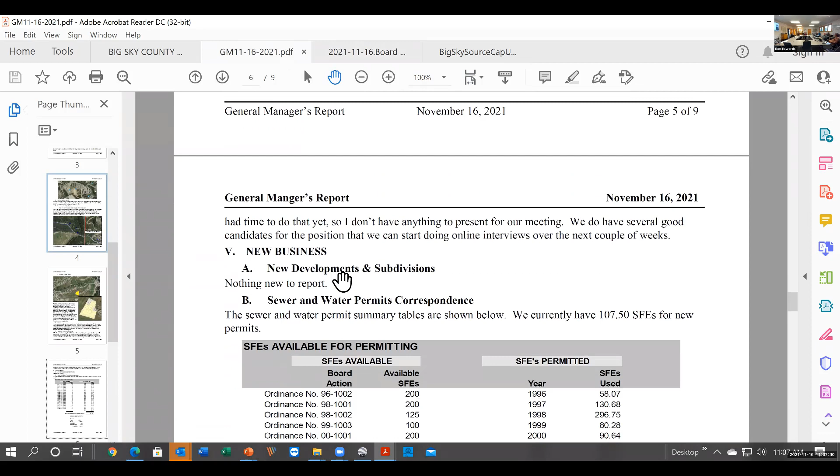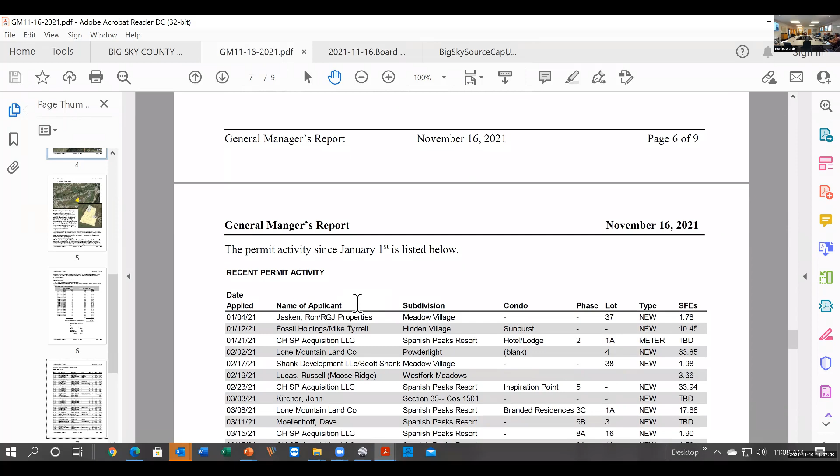But it may look different than what we've seen in the past - how it looks today versus tomorrow, with Ron's time spent in different areas than historically, and hiring someone for a GM role or similar. Maybe Ron's title or structure changes a little, and how things report up to a new general manager underneath that is ultimately Ron's replacement. That's the nutshell of what we talked about on the water and wastewater operator side. Scott's information showed we're very lean compared to other operations, which we should be grateful for, but things change with new plants, so the scope and scale has changed considerably, and the structure probably should too.

He used Estes Park as his example. AE2S is going to design a new treatment plant in Estes Park, Colorado, teaming with another engineering firm. Scott traveled there to chase this work and looked at their organizational structure - their size is comparable to Big Sky, it's a resort kind of community. It was interesting to hear what they do compared to how we're currently set up. For starters, they have an assistant general manager. What a concept - don't let it go to your head.

Two things come out of this: first, if you went through this exercise with the subcommittee five years ago, it wouldn't look anything like it does today, because you wouldn't have the litigation, the capital funding, the interaction with the resort tax - all the things happening now that weren't even on the radar. Second, the idea of tightening the dotted line to a solid line - Mike's had experience dealing with this, I've had it the last couple years, but you've had extensive experience. Tighten that down so there's no ambiguity or gray areas with direct reports. Need your recommendations, Ron, for that, and then we can identify how it compares to other entities. I'm excited to see what comes out of this.

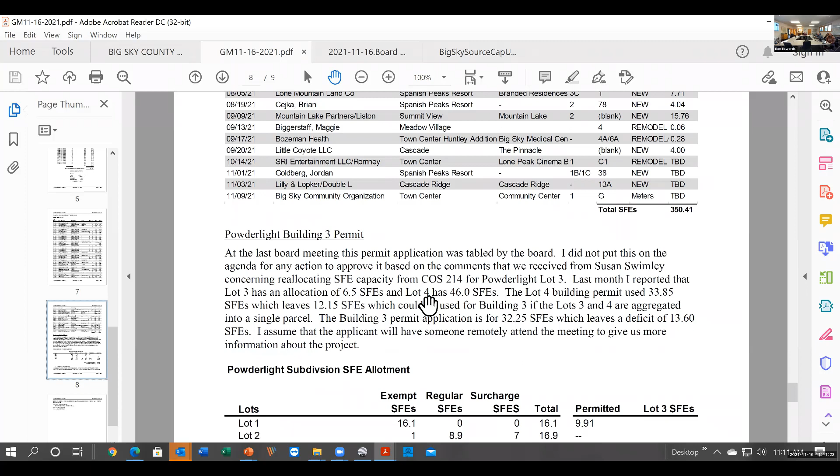Tom, this is Terry. I've got one other item, older business that I should have brought up in the financial section regarding the audit. The audit is not yet complete. I ran into some trouble and was delayed in getting some work done. Our auditor also ran into delays, so I have not yet received the information from our auditor to complete my piece of it.

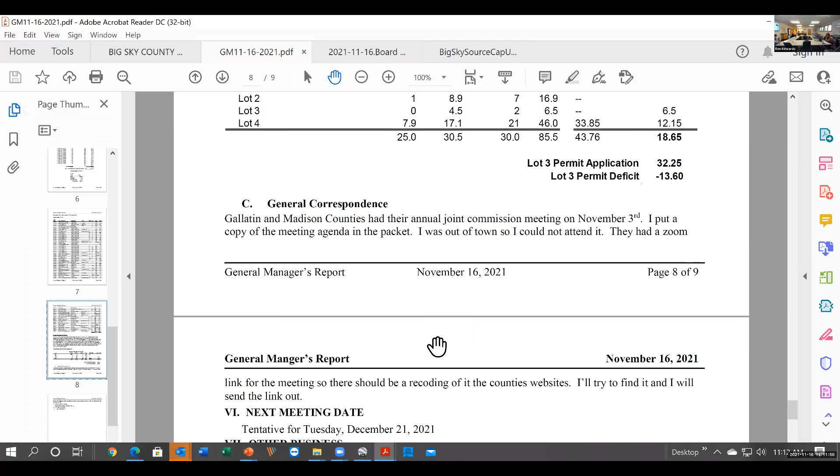We're hoping to get it for the board for the December meeting, but if that does not happen, I'm exploring with the Department of Administration getting an extension, which they do have available. You just have to file for it and give them some information. I'll update the board before the next meeting whether or not we'll have the completed audit. If not, we'll get an extension and it will be submitted in January or February. Thank you, Terry.

The last thing, under general correspondence, they had the Joint County Commission meeting November 3rd. I was out of town, so I did not attend. I believe there's a recording of this somewhere. I'll track it down and send the board the links, if any of you want to listen to the meeting.

It was entertaining. Did you go? A couple. Yeah, yes. It was a little bit of entertainment in there.